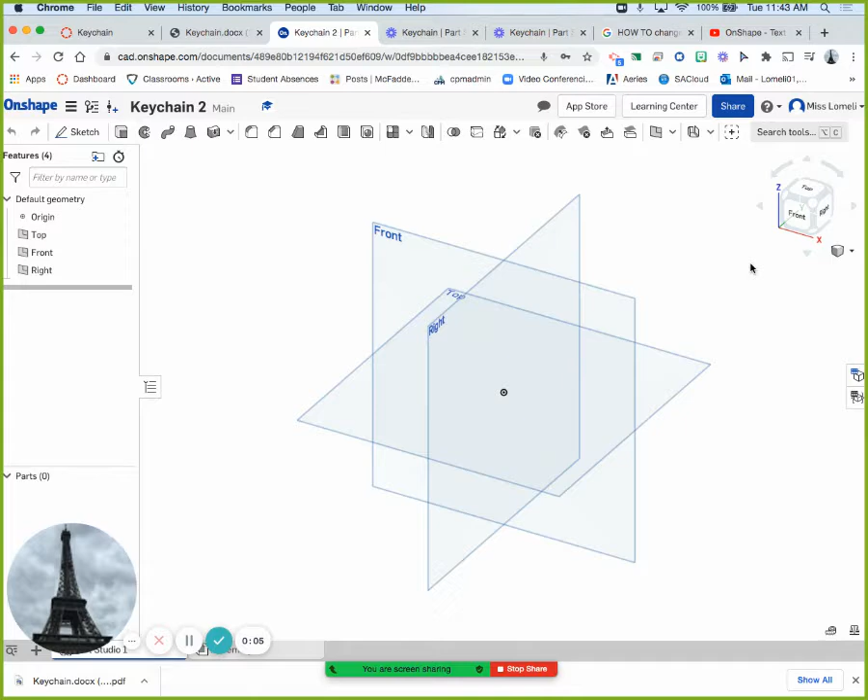So I click on this cube top, then I'm gonna click on sketch, click on the top view. That's like basic Onshape, right? So now that it says sketch 1, I know it's active.

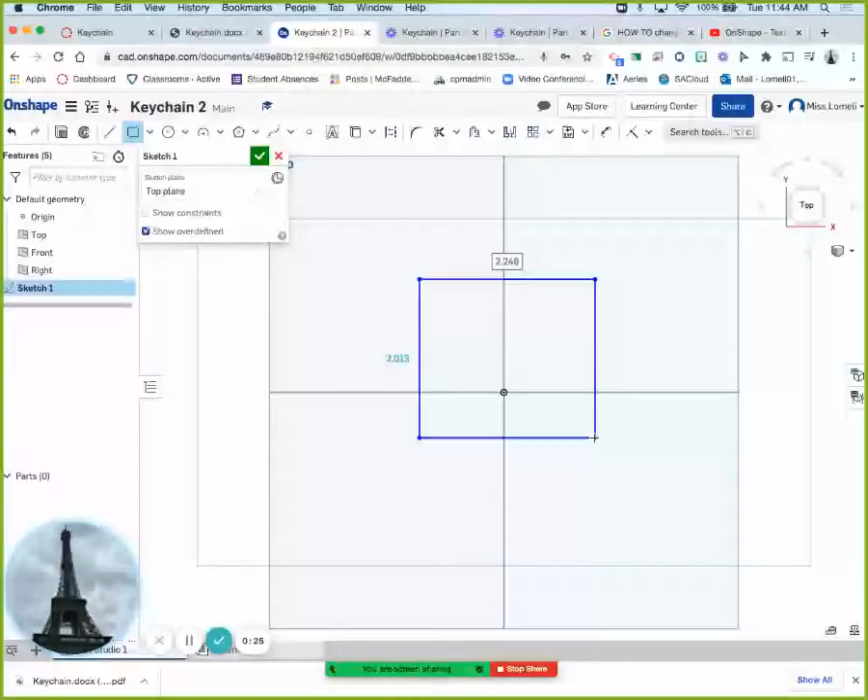What I'm going to do is start with a rectangle that is 2, enter, 2, enter - exactly what I don't want you to do at the end. So I'm actually starting with something I told you not to do.

Why? Because now that I have a square that's 2 by 2, I can draw my keychain inside of it and maximize the space because I know it has to be this big. I can't use this shape because it's a basic square and Miss Lomeli does not want basic shapes. She wants it to be creative.

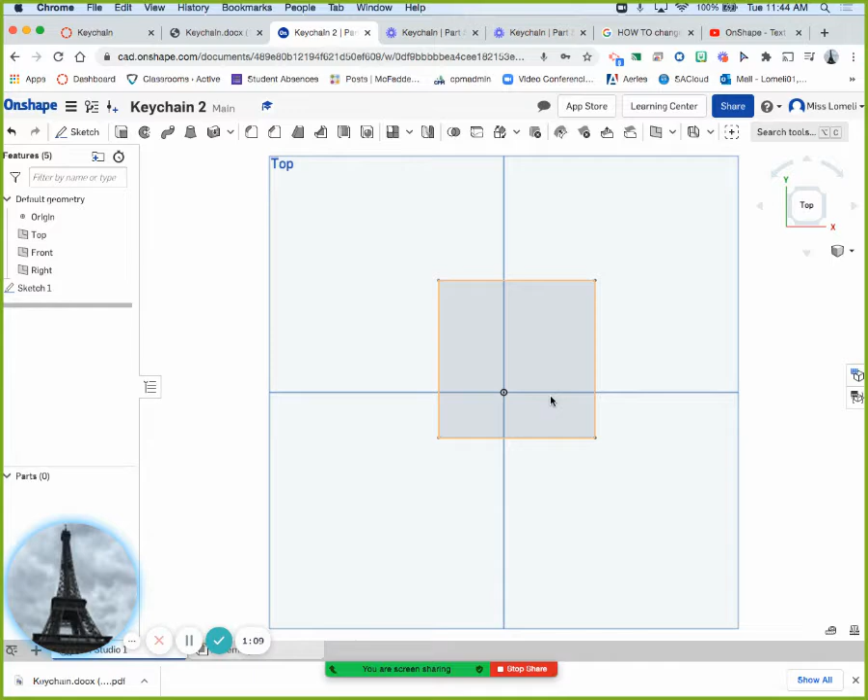So inside of this, I hit OK, there's my sketch. Okay, this is where it's like a limitation. I'm gonna go sketch here, I'm gonna click again on here. It's kind of like the puzzle cube.

And now that I have my sketch 2, inside of this I'm gonna do some sort of creative design. I'm gonna do the M again just to show you, and try to do it better this time. I wanna see where the midpoint is.

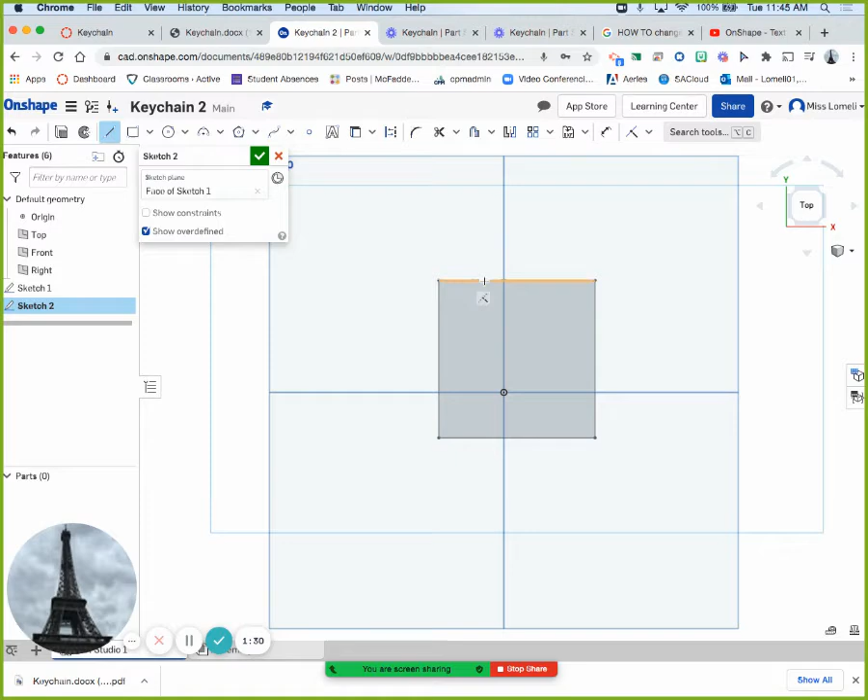I think it's right there. Okay.

So I'm gonna sketch out another M. It may or may not be one that I like, might delete it later. Right now I'm just using the square that I drew as my foundation. See, I don't like that.

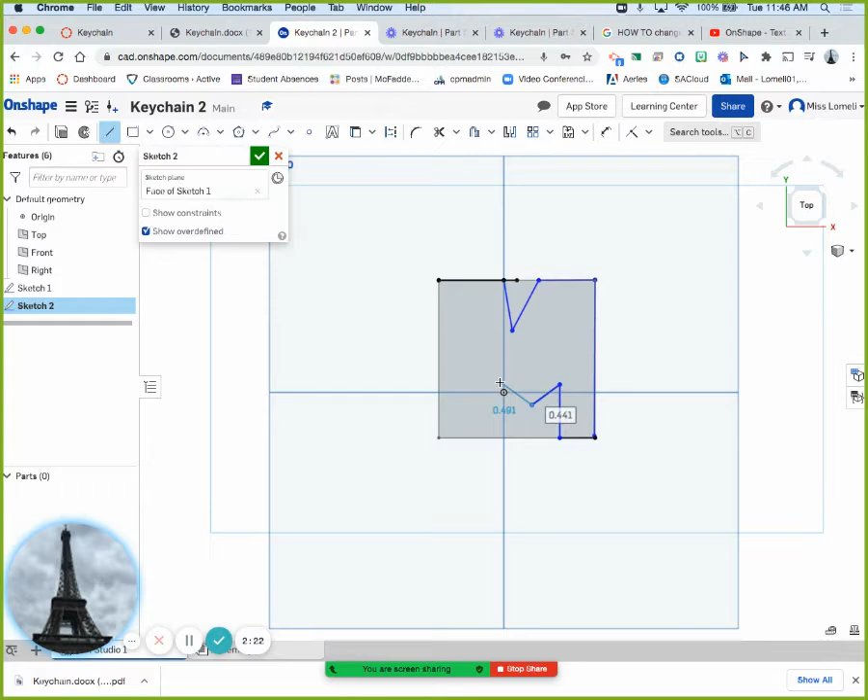So I'm gonna take the scissors part here and trim this line that I did not like when I drew it. Go back to the line, click, make sure all your lines are connected. If you're doing a freehand line drawing like I am, make sure all your lines are connected, so oh, this is going to be an awful M.

It's okay, I'm using it just as an example. Okay, so I just created the most ridiculous looking M in the world.

Now I'm going to extrude my shape, I'm going to click on it. Now if it doesn't let me click on the M, that means it's not a closed shape. There is something that's not closed.

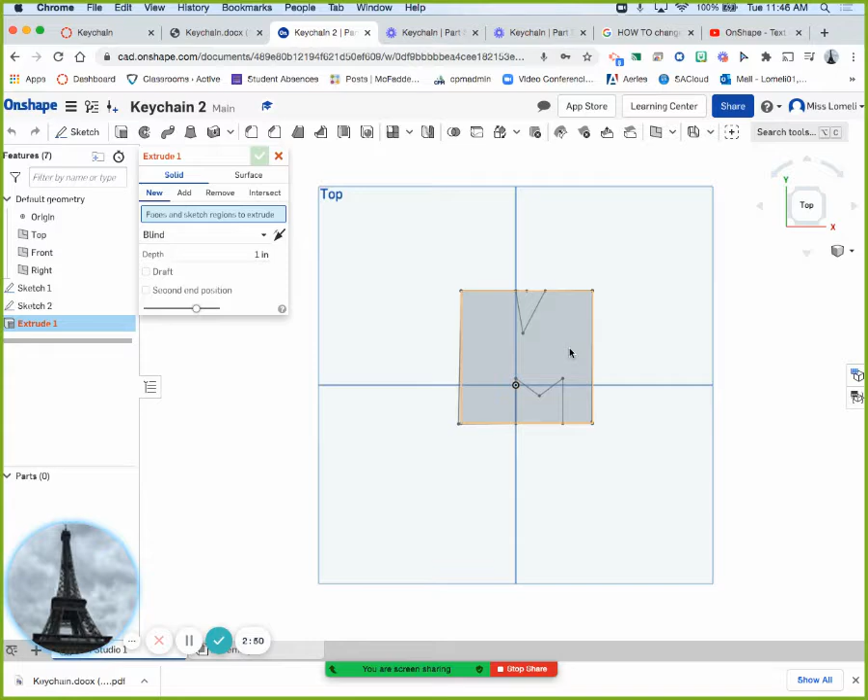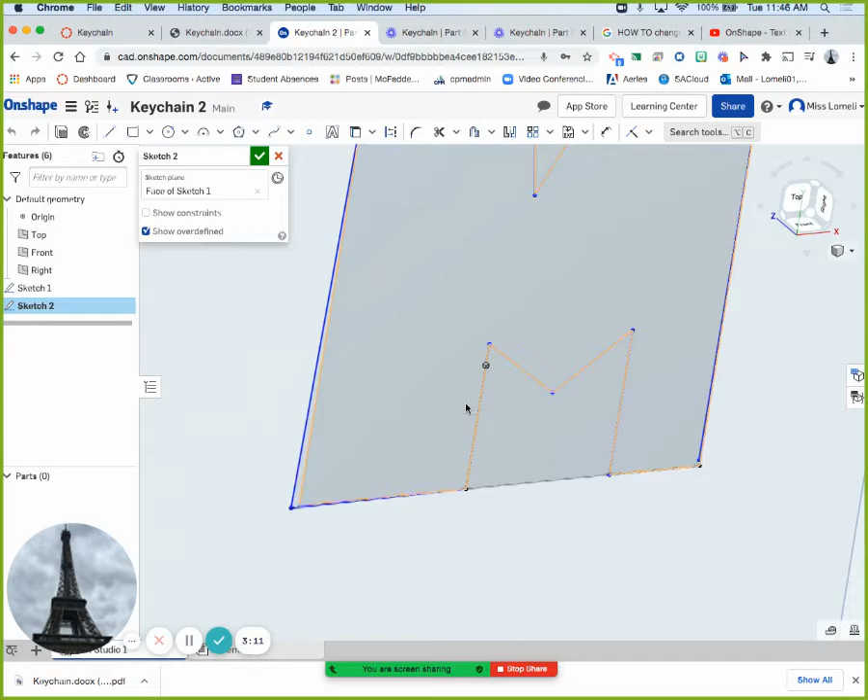You see how it's not letting me just select the M? That means that when I created sketch 2, something isn't connected. I can go in here and try to figure out what is not connected. If it's not connected, it won't extrude.

The bottom corner - left or right? Right, right. If you put your mouse towards what you want to zoom in on and then use the wheel, it will zoom into that corner. Oh my God, yes, do you see?

Because I did this on purpose, I totally 100% did this on purpose. You see how it's not connected? So it won't extrude. If you find it, and if you have someone awesome to tell you where you didn't connect, you just connect it, click, click.

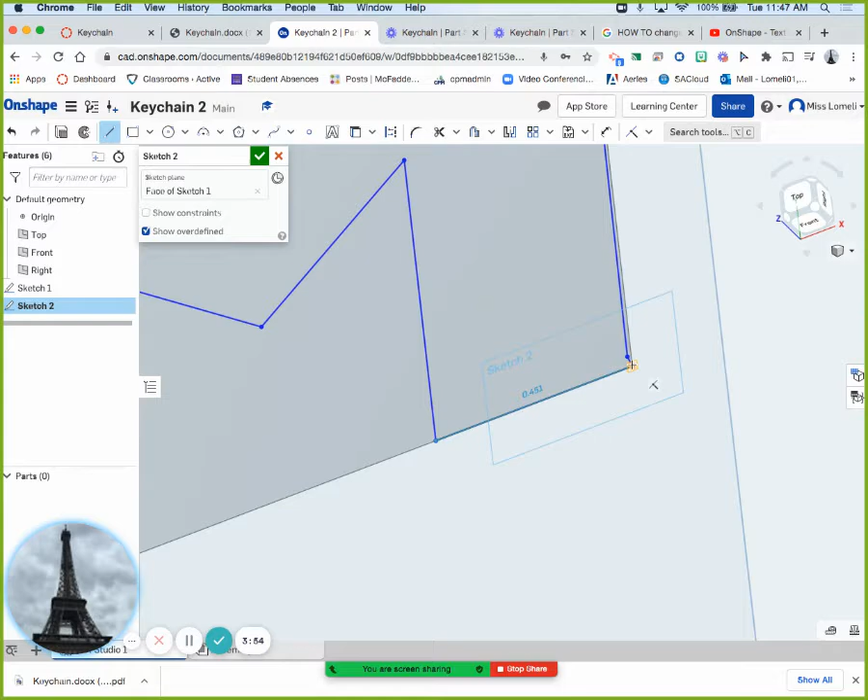Is there a bottom line? If you're not sure, you can just draw it in again. It has to be a closed shape. So if you can find where it's not connected, then just connect it. If you just can't find it, sometimes it's easier to redraw it.

So now let's see if I can extrude just the M part. Yes, you see how it's highlighted? Orange. Now the default is 1 inch.

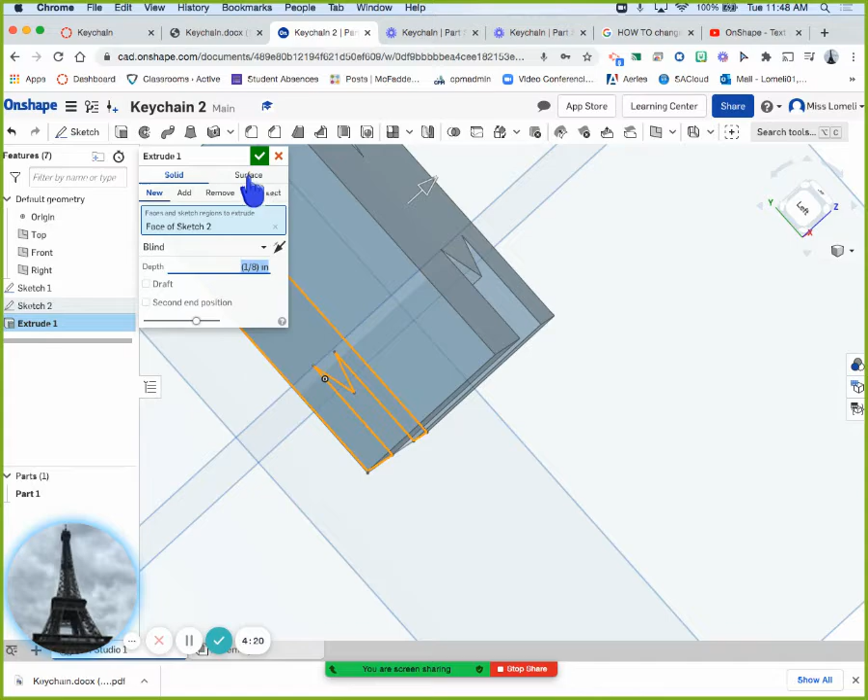That's too thick, I won't print it. If you go here and type in 1-8, hit enter, it will shrink it down to the perfect size of 1/8. Okay, so that's just the basic - again, I did the square 2 by 2, and then I maximize the space.

Okay, what I'm going to teach you now is how to create text, because you're going to have to add your name. So sketch, click on this, then you're going to click on the A right here.

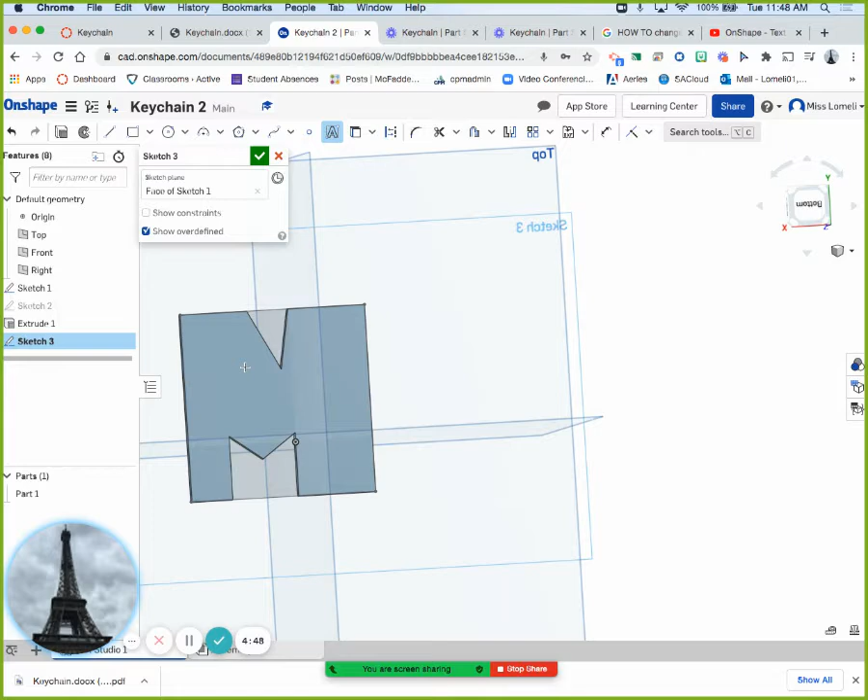That's to add text. Now what I learned the hard way last period is you're going to be drawing a text box. How tall you make this text box is how big your letters are going to be.

If you're only going to write 2-3 letters, make it big. If you have a long name, I would make this text box pretty small. I learned that the hard way.

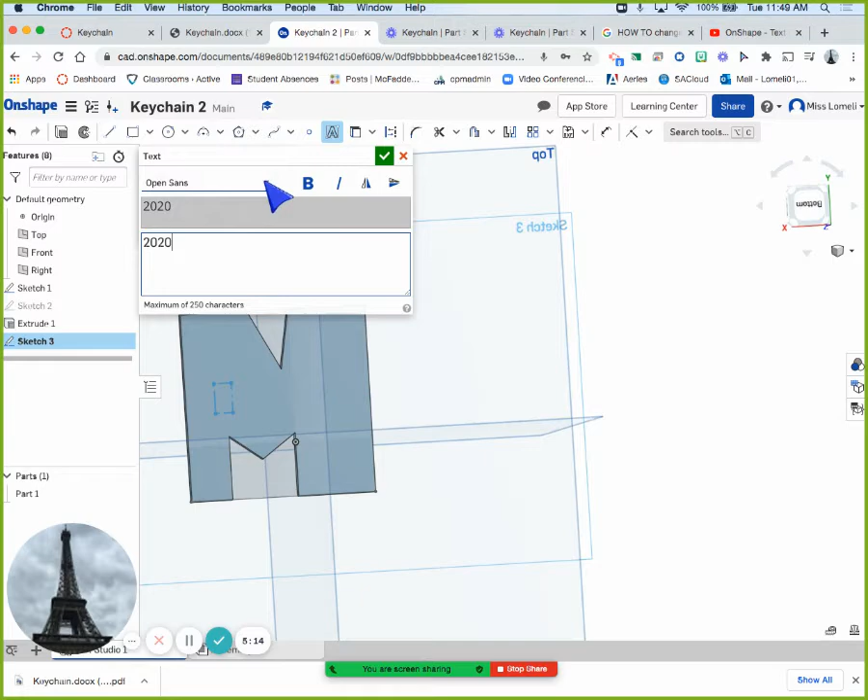So you click on it, and then you're going to get this box, type in 2020. These are the different fonts you can choose. Honestly, they all kind of look the same to me, but you can test it out. Hit OK.

And oh, that's because I'm not - let me go back to isometric, top view. Okay, so it's a little bit off.

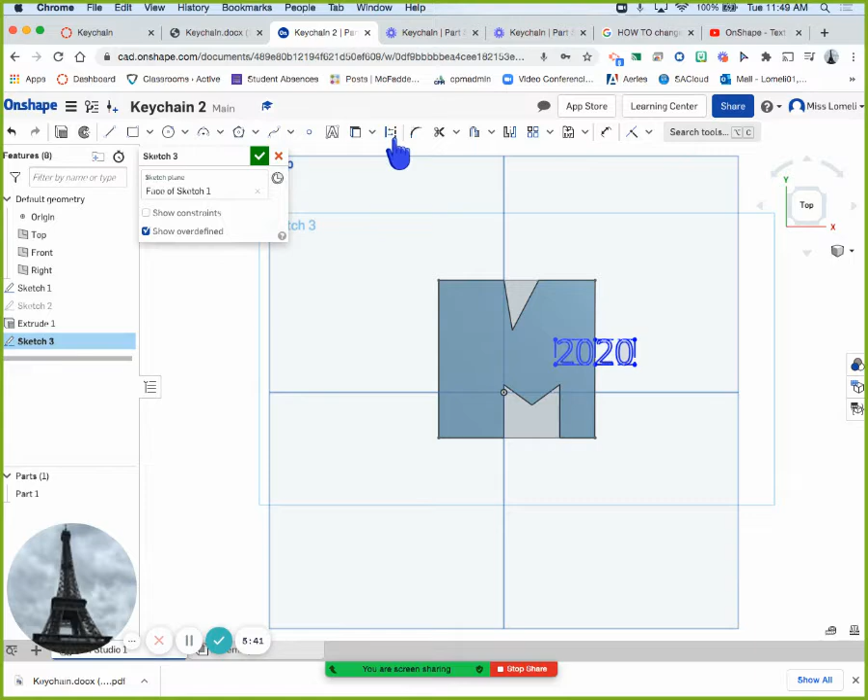Hopefully you take the time to put your text box on the left side. I did not pay attention. If you click on this one, construction, I noticed that I was able to move it over by clicking on the sides, and then you can center it like so.

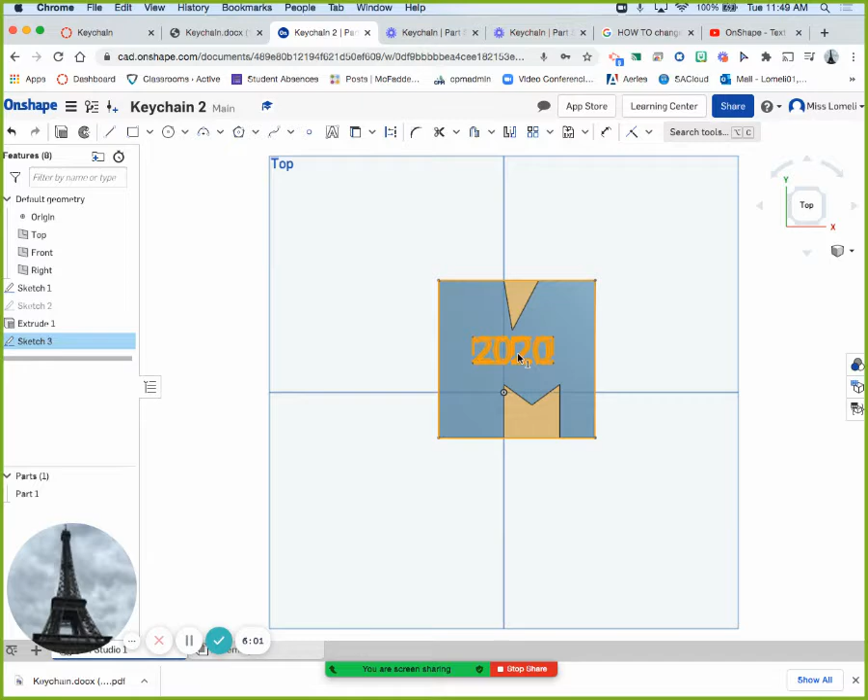I like that. And then you're going to extrude the 2020, or the name that you're going to put. Click on 2020.

Yeah, make that orange. And then here I'm going to actually - what I discovered last period, if I do 1-20, 1/20th - that worked out, 1/20th.

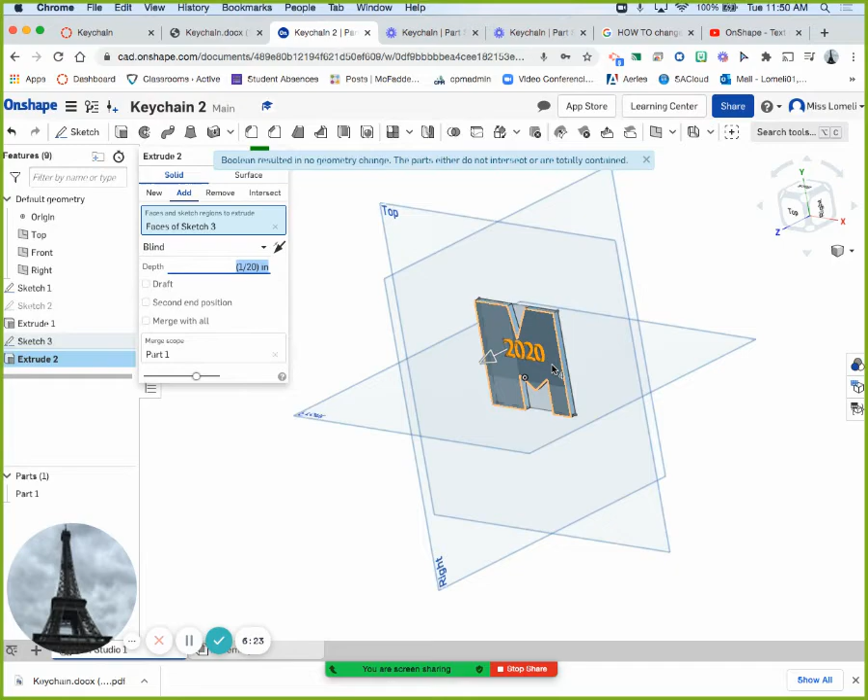And zoom it in, and then green check mark. Let's see if that actually works.

Uh-oh, donde se fue? Oh no. Okay, what happened?

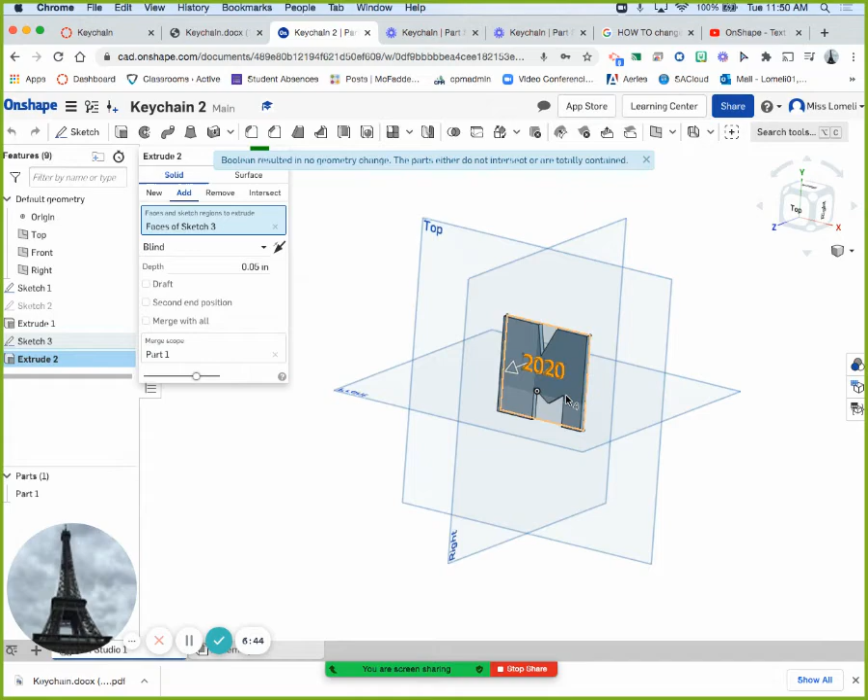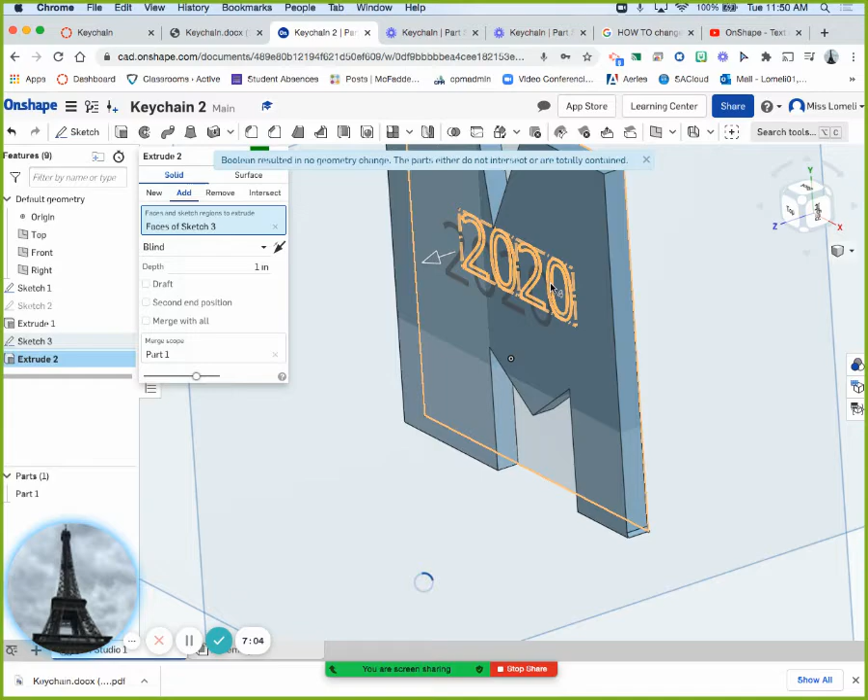If I do 1, will it do it? I also learned on a YouTube video, if you just do this, it will extrude it, but for some reason it's not doing it. There it goes. Okay, wait, stop. But I don't want it 1 inch, I want it 1/20th.

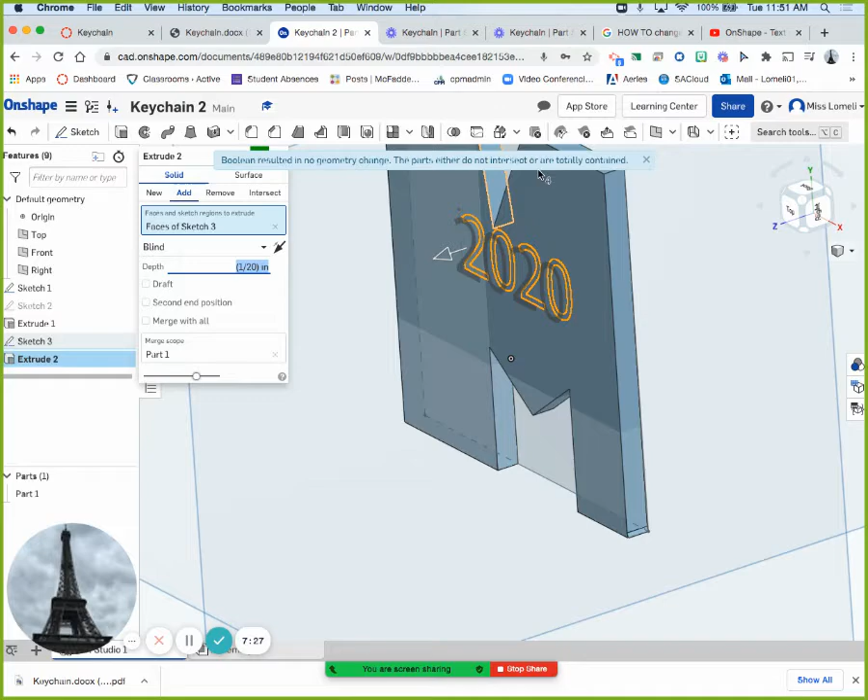Boolean resulted in no geometry change. The parts either do not intersect or are totally contained. Oh, are they totally contained? They might be totally contained.

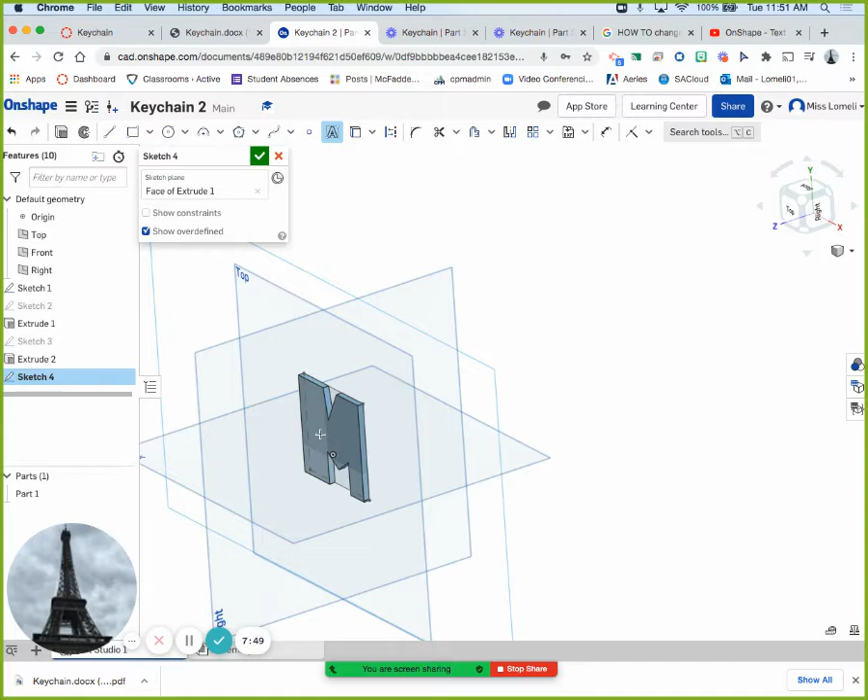Okay, so I'm just going to do it again. Sometimes it's easier to just start again. So, sketch, here I'm going to add. This time I'm actually going to be—here, click, add your text box, and then 2020, enter. There we go. And I'm going to extrude that to 1/20th.

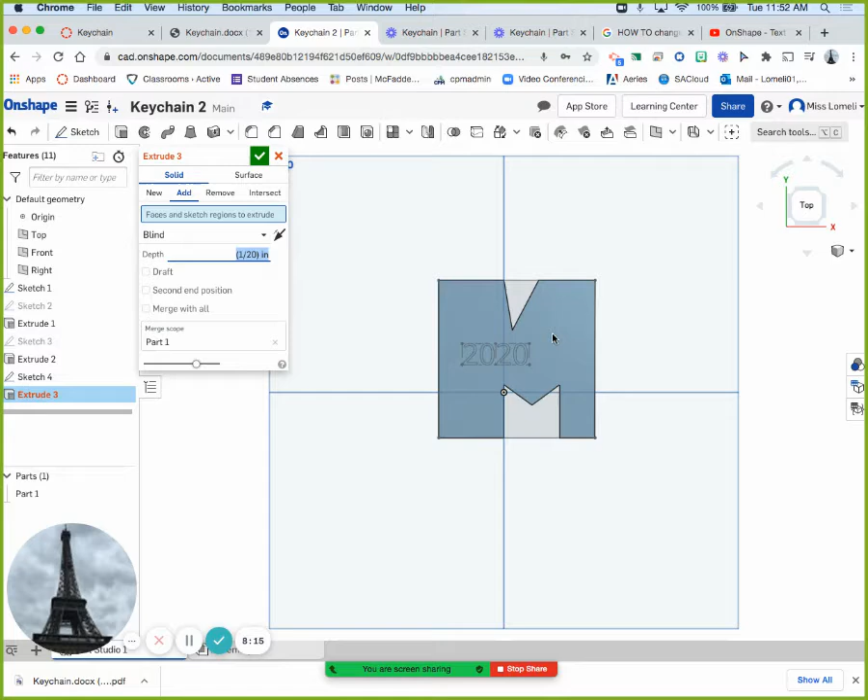Yes, now I did it. Okay, so it extruded it 1/20th, so it pops out. On the other side, it's completely flat. I'm creating a keychain, so just like that.

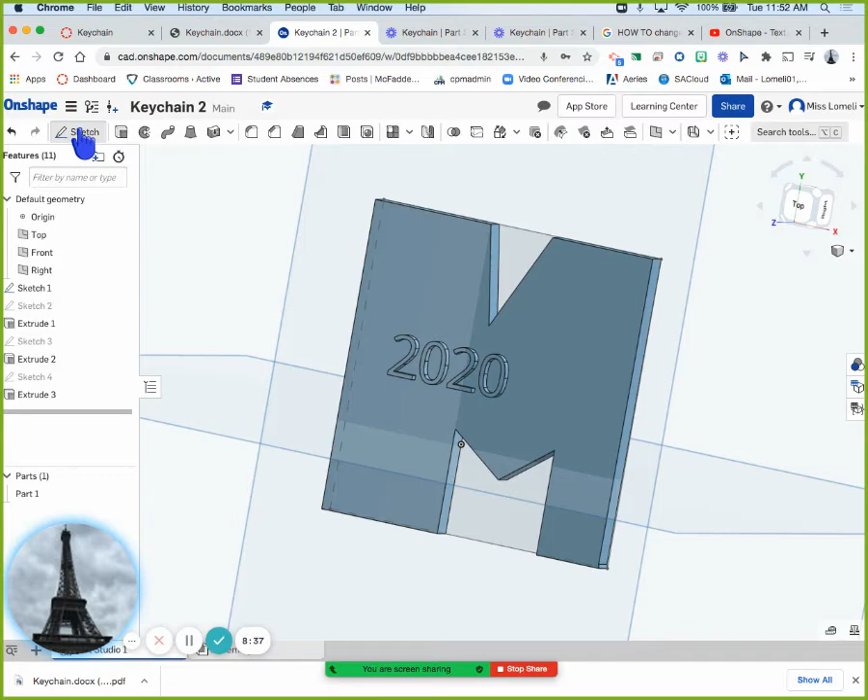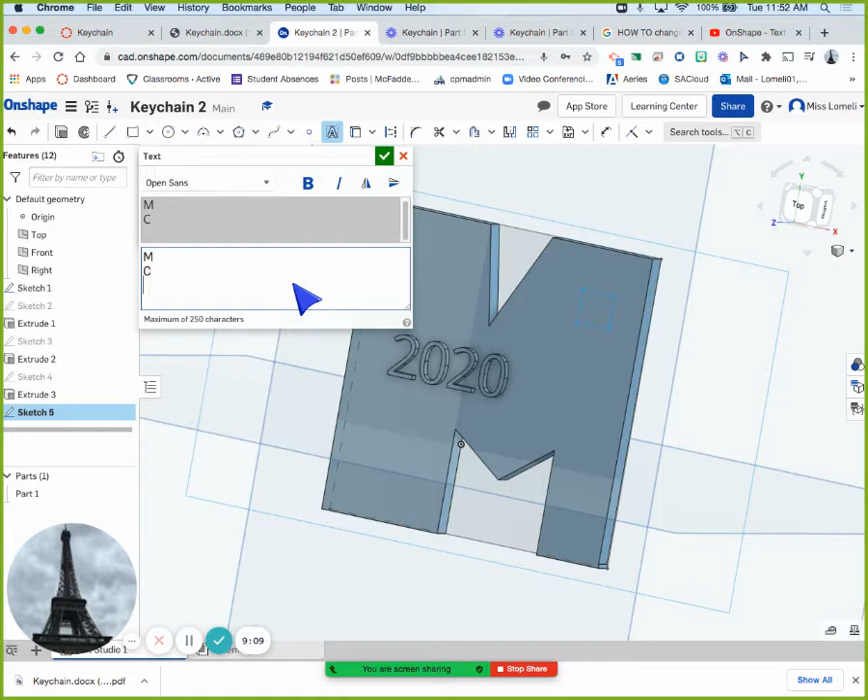I'm also going to create, like I did last period, another text, but this time what I'm going to do is—remember, whatever height your text box is, that's the height of your font size. I'm going to type in McFadden, but going vertical. MCFADDEN, green check mark.

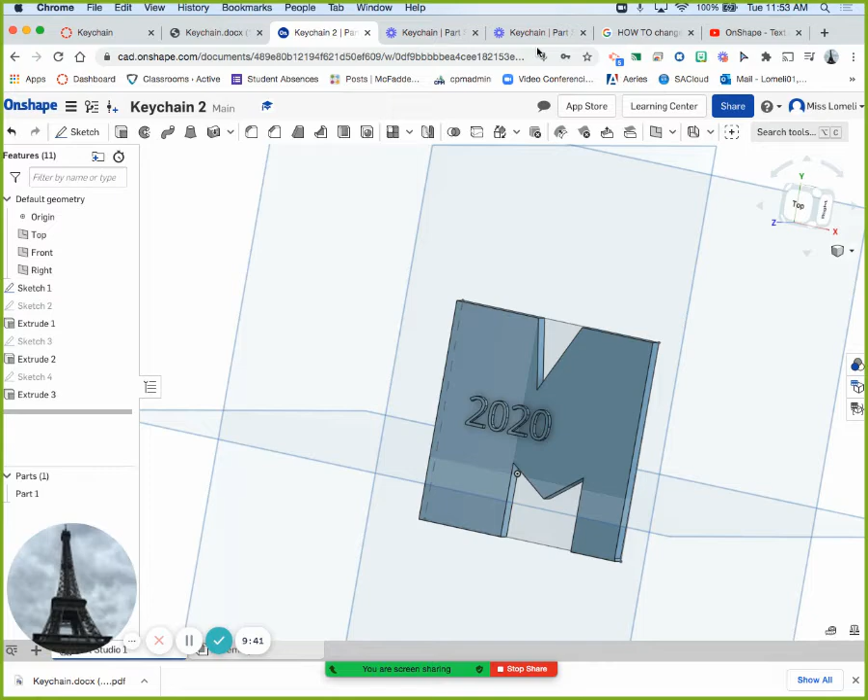So this is where, okay, these letters are too big, so I got to shrink this down some more. And that's what I was having trouble with last period. The only video that I saw was like you had to just guess how big it was, guess and check, guess and check. There was no part where I could just enter the font size, like how we are used to in a Google Doc. So it's kind of frustrating in that part.

Let me just create something really fast so I can show you. In order, you can right click, edit sketch, delete sketch over here on the left, David, to answer your question. Honestly, sometimes if it doesn't bother you, just leave it alone. As long as you don't extrude it, it disappears.

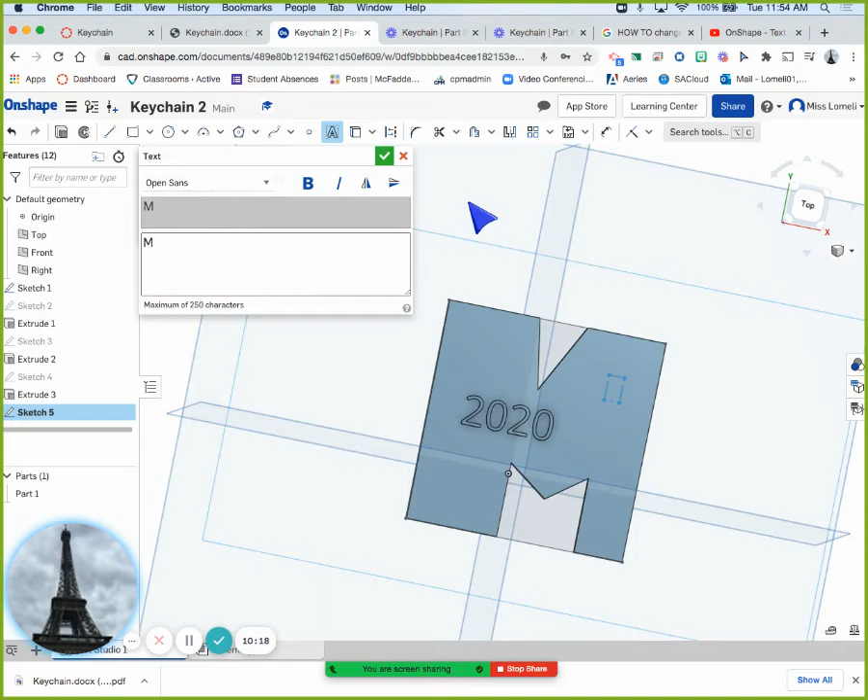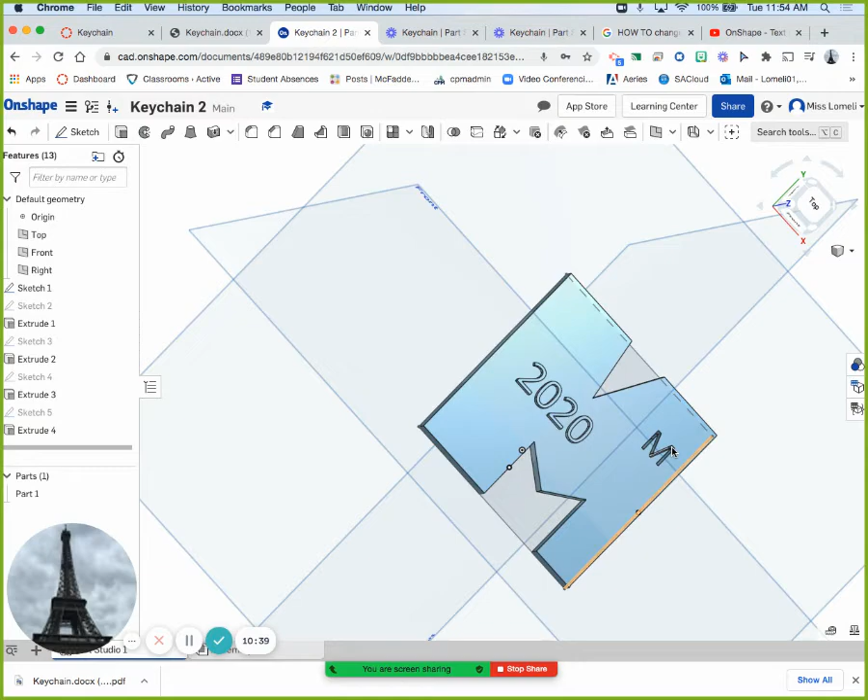Okay, so I'm gonna show you the opposite of extruding. I'm going to engrave it. If I click on remove up here, instead of making the M pop out, it's going to remove it completely. If I zoom in, you see it remove the M completely, like it completely engraved it.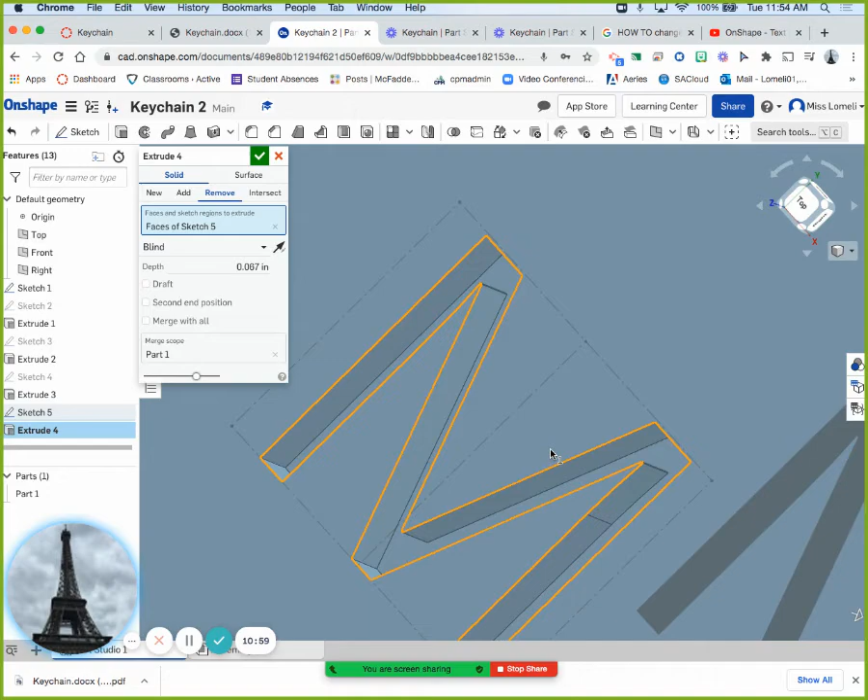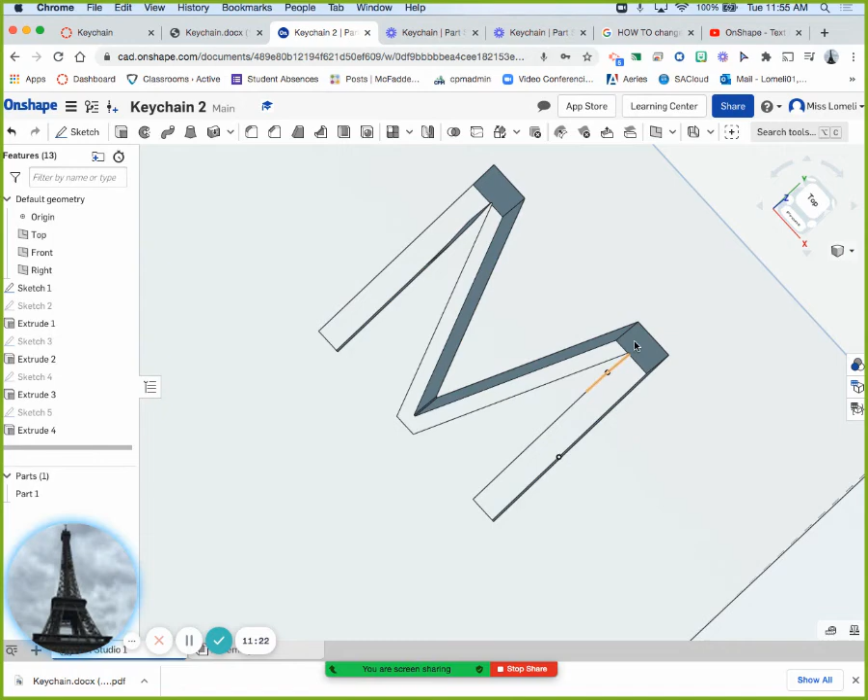You can edit here, and instead of removing, I'm going to do a 1/15th removal, which means it's less than the thickness of the keychain. So you see here, it didn't go all the way through. The M you can't see it on the bottom side, but it is engraved. You see it kind of goes all the way through, but it doesn't. So you can have fun with that too.

One last thing I want to show you is the hole for the keychain. So you have to add a hole here in the corner. You're going to add a sketch, and then create a hole, put it in the corner, draw it out, click. Now the measurement, the diameter of this is 1/8. If you type in 1-8, it will do the math for you.

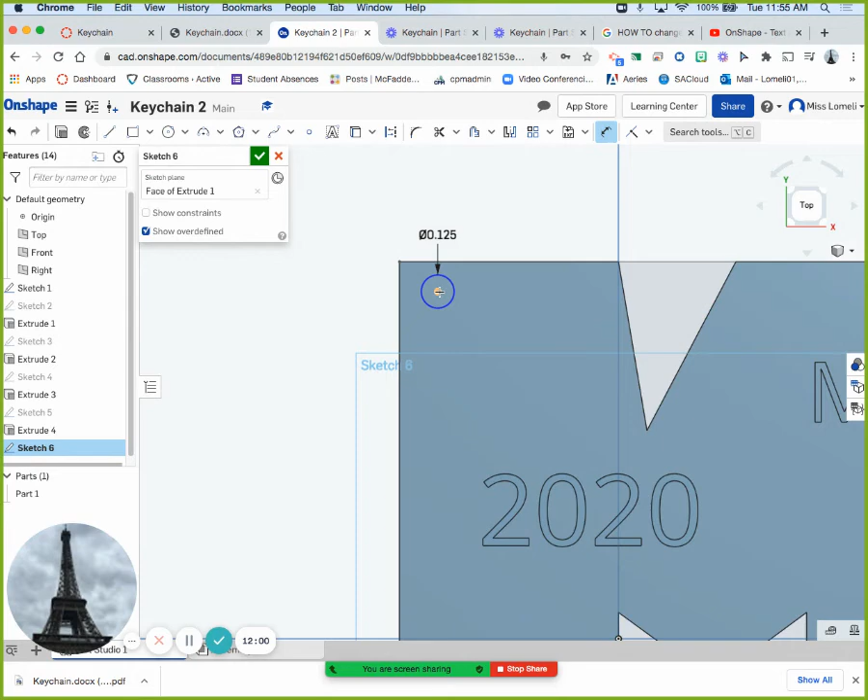Now you click on dimension. You can type the letter D on your keyboard or click here where it's dimension. Click the center of your circle, the top of your keychain. Click—that also has to be 1/8, 1-8, enter. And then the center of your circle and the left or right side, depending. Click, and that is also 1-8.

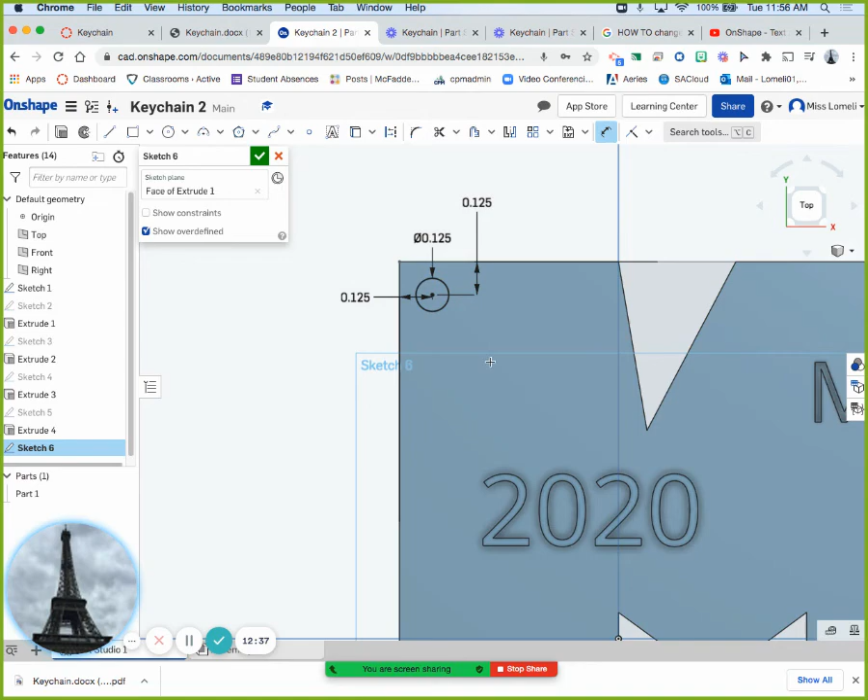So we're going to center your circle. It can't be too close to the edge, because then it will bleed, and you'll end up with one giant circle that's not really a circle, it's an open circle. It can't be too in the center, because then the ring won't go through it, since it's too deep into your shape.

And then you're going to extrude this all the way because it's a hole. Just click on it and then hit remove, and then hit the green check mark, and it should work. It just takes a little moment. So there you go, that's the hole to your keychain.

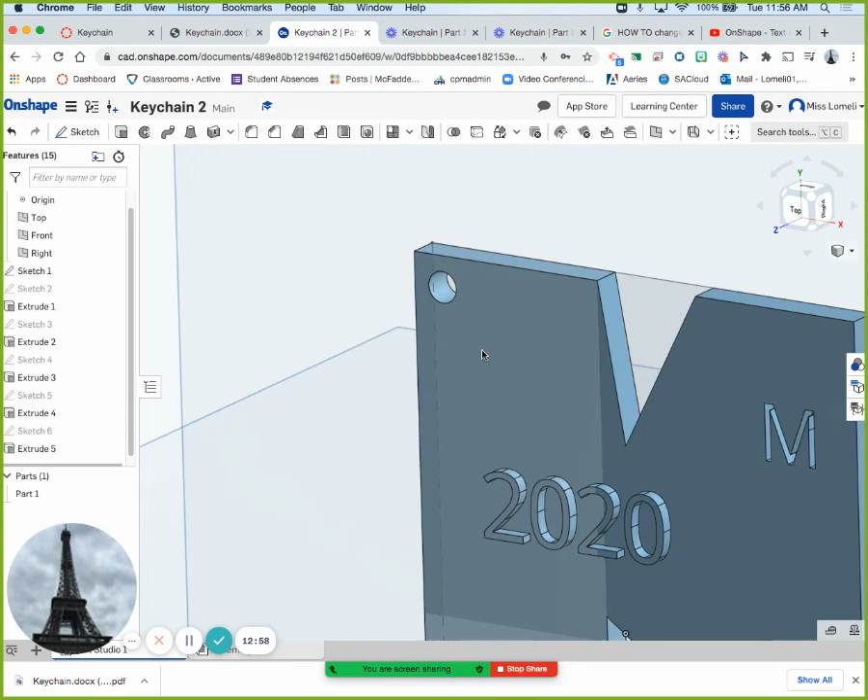So this is just a general keychain, the letter M. If I showed you the one I did last period, it does look a little bit better. If I go to Onshape, the first one I did was a lot better. I have proof. This one.

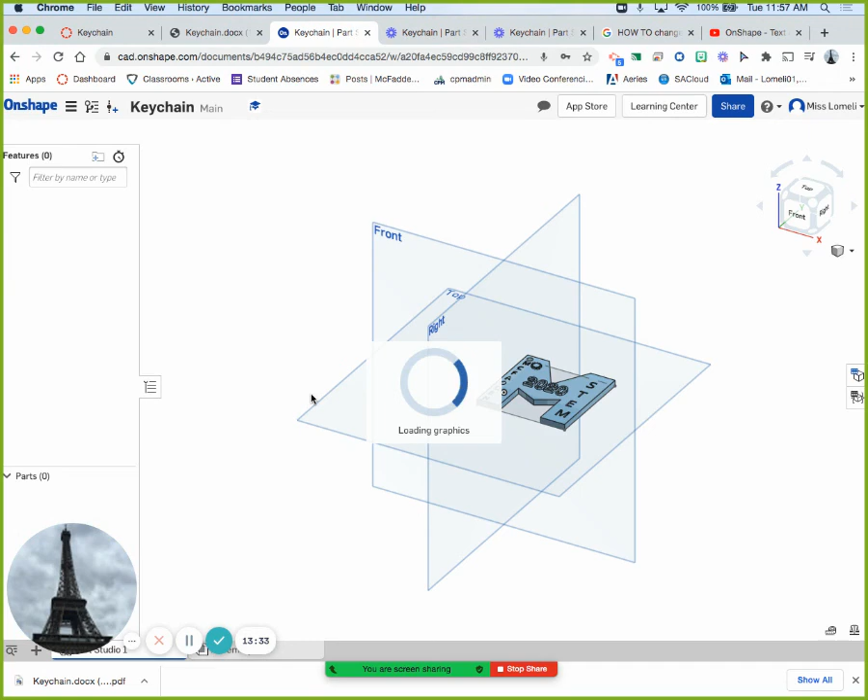If your computer is running super slow, my suggestion would be to close all the apps that are behind to make your computer run a little bit faster. Even if you're listening to music on YouTube, that does slow down your computer. But I'm not looking at the video. I know, but it's playing in the background. So if you're experiencing slowness, Onshape does take up a lot of your speed, so don't be running other applications in the background.

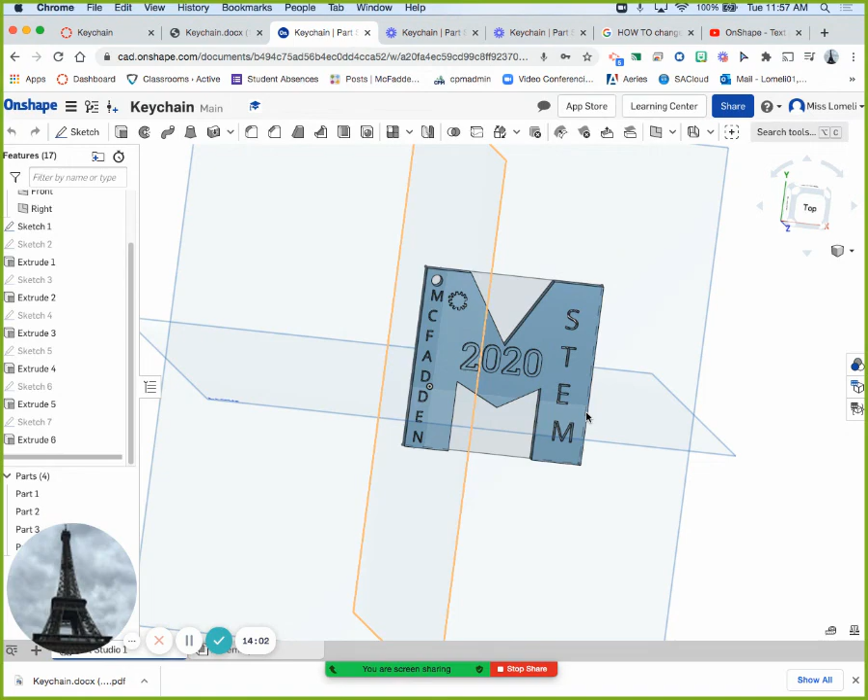So this is what I did 5th period. You can see that it took me a whole period just to figure out the size of this McFadden. I did a couple—you see, I have a lot of sketches going on. I might change it this period, we'll see. The STEM and McFadden go all the way through. The 2020 is popped out. So you have some creativity, some freedom to be creative on this.